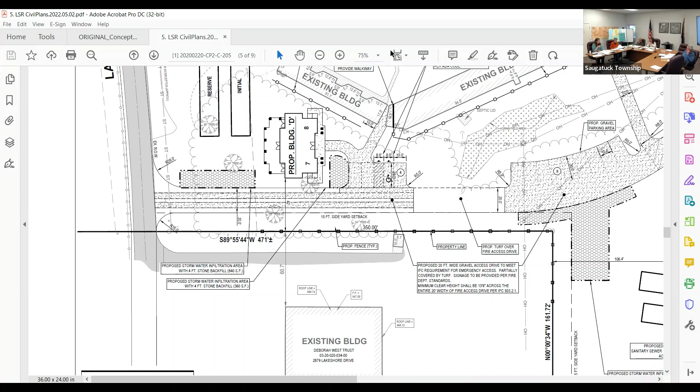I did speak with the fire district, and the applicant has an incomplete submittal to the planning department for a private road that connects from Blue Star Highway to this property. It includes part of what's labeled as the existing two-track at the north.

I asked the fire district, if that private road were to be developed, would that meet the fire district's request for the second point of egress and ingress? They suggested it would be uncommon for them to respond to a call on Lakeshore Drive and use a private road from Blue Star, that it wouldn't be the most intuitive, direct route. They said that if this driveway was not installed for this lakefront home, all of the drives within the current development would have to be widened to 20 feet. So it poses some site constraints for their existing development.

The proposed driveway is a 20-foot wide gravel access drive that meets the requirement for emergency access. It's partially covered by turf. Then there's a proposed gap between that 9-space parking and this two-track gravel drive, but that would be turf over fire access drive, so planted over it. So there wouldn't be a paved connection from the driveway for the lakefront unit and the 3 units at the rear. It would just hold the weight of the fire truck.

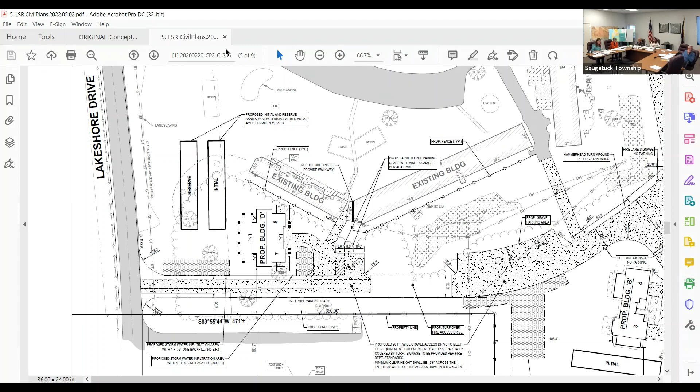I did note a few other things in my report, just about the wetland delineation. I know the engineer replied that there were no wetlands. We just put this caveat in there because the site is within 500 feet of Lake Michigan. There may or may not be a need for an EGLE permit, but we want to see verification one way or the other. The township engineer reviewed the site plan and provided some comments.

The buffering was something that I was concerned about between the 2 plans, so I think that's worth discussing. The lighting is downward facing, it's modest and pedestrian scale, it meets the requirements of our ordinance. There would be no outdoor storage. We didn't have many other issues, it was mostly that we wanted to see updated floor plans.

Some of them were mislabeled, and some we weren't provided renderings for each floor in the building, so it was very unclear, especially where that parking was integrated. We didn't have a floor plan for that. We don't see an elevation showing the height, so I just want to verify that the floors and the height meet our ordinance.

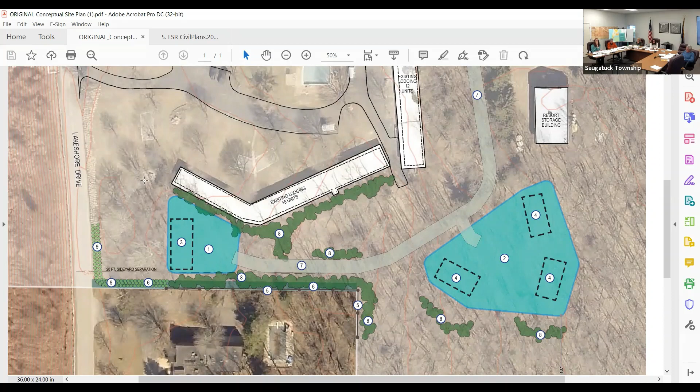After that, we got the approval and moved forward with the specific site plan design, working through with the fire district, the engineers on drainage, and the health department. There's a lot of different aspects. The plan has evolved to the point that it is now, but we still assert that it's very much the same.

Some of the things brought up by Lene I'd like to address. The first is floor areas, and I think the confusion comes from terminology. Floor area is an architectural term for the usable living space inside the structure. We as civil engineers use footprint to describe just the overall boundary. So the footprints here are very close to the footprints on the conceptual plan.

I created some confusion by putting floor area in the general notes, and I think that was in the application. But if you go with the footprints of the outer walls of the building, we're within about 20 square feet of what was proposed. The front building, the Lakeview building, actually has a slightly smaller footprint than what we showed with our conceptual rectangle, and the ones in the back are slightly bigger.

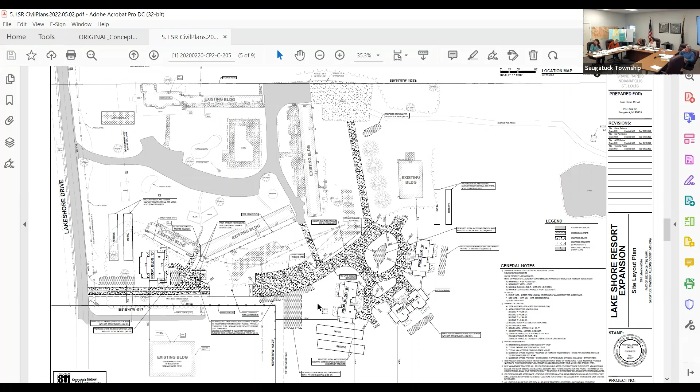Would you like your plans up on that board? I can put those up there. For the public too, at least, even though we have them. But I don't know if that would be helpful for people to see. Or us. Yeah, I think we want to see that too. Where's the best spot to go over here? I don't know, how do we get everybody to see... well, this makes the parking better.

We did this plan to show how little is really gravel here, once you bring the turf in to make it look narrower.

They do have a section of the fire lane here that is only for emergency access, so only cars staying in this front Lakeview building would be using this access, just these two units. Everybody else accesses through the existing resort to get to the back units.

Did you eliminate the hammerhead? No, the hammerhead is actually back here. So the emergency access, the fire truck would come in here, go across the turf, and then they would turn around and leave that way. That was actually a more direct route than having them come around through here and circle around to get back there, so that's why it was set up that way.

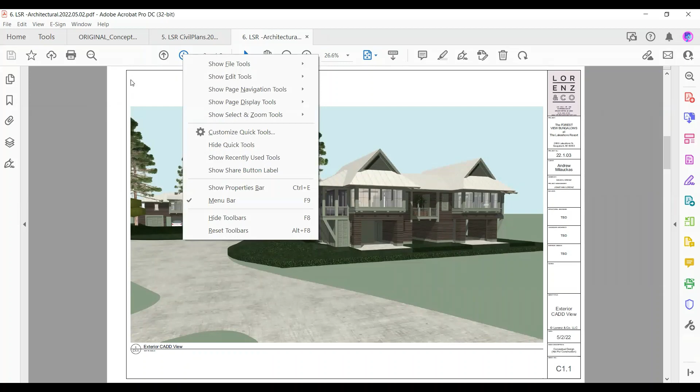But it's not gonna be right there. You'll notice it though when you go down there. I mean, well yeah, it'll be the new building. Yeah, because there's a lot of other new buildings on it too.

So what square footage of this building? No, well, the total - each unit square foot total. Oh, 26. Plus the deck, I don't know what that is. You know what this architectural square footage is of the Lakeview building? The Lakeview building is...

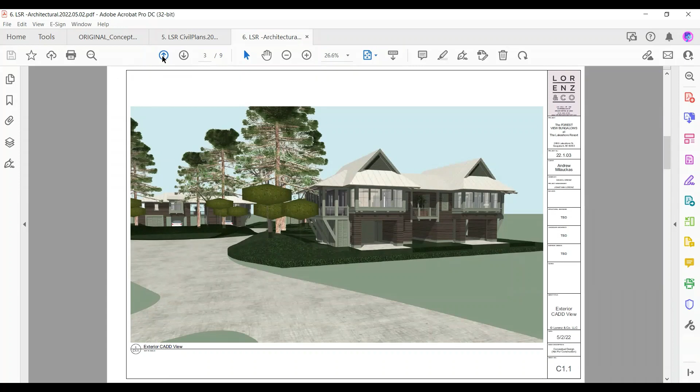Roughly 2,500 square feet. Yeah, that's right, we have 2,600 on the. And then the decks are another 500. Maybe you added it up. Well, the front deck was 528 on the one, let's see.

What's my total now? That's great, 600. There's some access ways and stuff that'll make it about 600 square foot a deck. That's per floor, so there's 600 above and 600 right below. But you're still even with that under the 7,000. We're at 65.

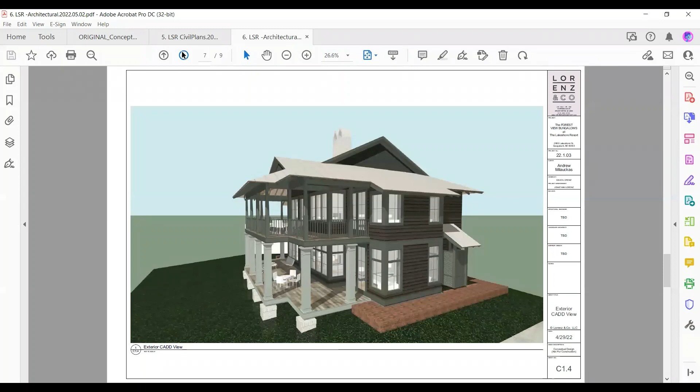I think the thought initially this evening was questioning whether this project needed to go back to the ZBA, just for clarity, but I think the overall concept is there. I'm not sure that I would agree it has to go back to ZBA. Initially we didn't have a lot of input on this project, and tonight we have the property owners here with us that would be most impacted, and to hear them say they're 100% for this makes me consider that we probably don't have to have a public hearing on this project, correct?

That's the feel. If we can come to agreement that you did go through all these things and say the fire district and the engineering report and all of those things were doable. You did not say that the report from Lene was doable. I guess just for clarity.

Andrew or Joe, what is the square footage of all of your current resort buildings that have the lodging in it? I don't know that I know just the lodging, but the footprint is, I believe, 20,000, including all structures on that parcel or all buildings on that parcel. That would include the maintenance barn.

When we established the 7,000 number in our ZBA application, we never intended that number to include porches. When we planned the project and prepared that application, although it doesn't say it in the application, we created those numbers saying that didn't have to include porches because we were talking about interior space and thinking about the walls, not porches. So when we created the inventory of the existing buildings, we didn't include our overhangs and porches in that number. From our planning side, we've been consistent in how we look at that 7,000 square foot number. It was never intended to include porches, and these buildings aren't bigger than we intended them to be.

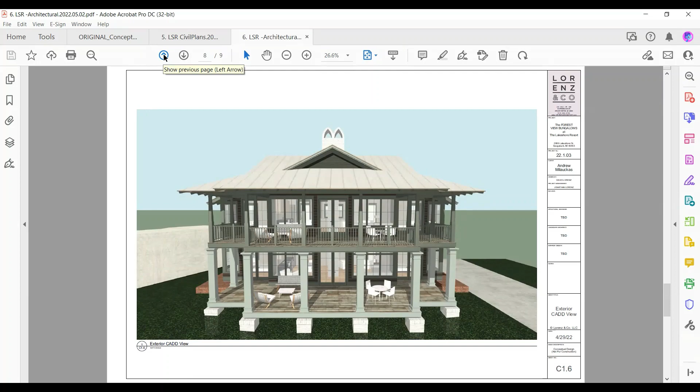I just have a question about the parking. If we went back to the parking conversation, would you be receptive to us relocating a few parking spots into this area if they weren't additional? To the front house, yeah, to here, to have more than the 2 spaces. Could we relocate 3 or 4 existing spaces back to this area?

I think we need to see a full current parking count with unit count and your whole development, to know where you're at with parking today and where you are compared to the ordinance requirements.

So you're really talking about visitor parking, because you have enough parking for just the units itself. So now you're just talking about additional parking for your visitors, which I would want to see. Because now you're incorporating more than just this area - you're trying to bring some parking and allow some parking for your other portions of your resort. So I would have to see that.

What do you do with the scenario you spoke about earlier, that the 2 sisters agree we're gonna spend 2 weeks there - it's not mine, I don't see that. What I'm saying is, if you have somebody coming from Chicago and one from Detroit, they're gonna have 2 spots.

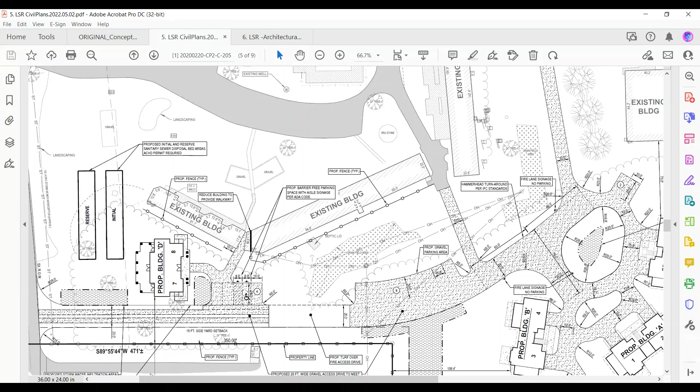So we're making this now consistent with the ZBA plan. Its purpose, especially now with limiting the parking here — I can imagine someone directed to pull in this way and maybe not find a place to park, come here and want to go back, rather than sending them back around in front of these units where guests are sitting at the pool. They're able to come back without pulling back into the front of the property. It's really just a completely internal thing that is consistent with the ZBA plan.

Anything else? I can make a motion. Okay. Move to support, approve the site plan for Lakeshore Resort at 2885 Lakeshore Drive.

Building renderings and floor plans with height dimensions shall be provided. Floor plans for all floors for each building shall be provided. Height and floor count shall meet the R3 district standards.

There shall be no outdoor storage. Parking is per ordinance section 46-47, H8, which is for a motel — one space per sleeping room, plus four additional guest parking spaces. Did I say that right? Yes, okay.

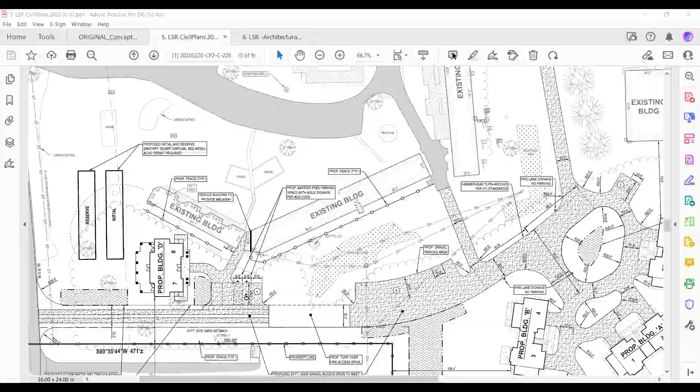Motion passed. Thank you so much, well done. Thank you for your investment in this project, and thank you for your patience. And thank you to your neighbors to the west for coming in and sitting through this. We really do appreciate it. It's been interesting, and it's a good combination. You guys are protecting us, although it's not needed in this case, but in some cases I'm sure it is. So it's a good system.

Welcome to stay, or you're welcome to leave. But we do really appreciate you being here and representing your project. I can't thank you enough for that. I look forward to seeing your project. Thank you.

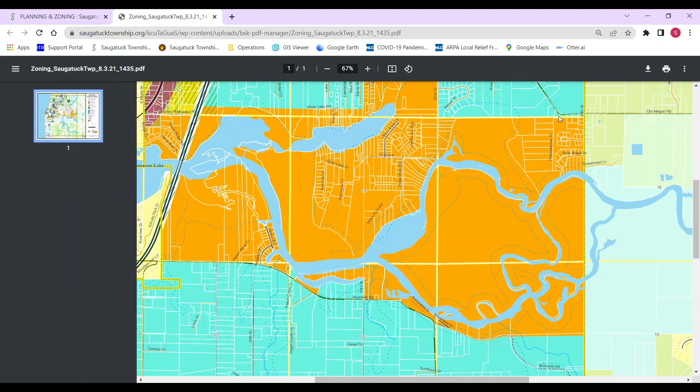So Becky, is this the dotted line you're talking about? I've got it on the screen now, see it's right here. It says natural river boundary, the tiny blue dots. It's on both sides, but there, just in this area. So that's where it is now, and we would pick up this area? No, no, it would not, we're not even asking to do that. It just goes right along, it's 50, however many feet the ordinance says, it goes like that. It's there, but this is way out there, that's the channel.

And that is already under litigation at this point, so I guess my thought is this is premature, actually. I certainly respect all this, but there's a lot of things I would want to consider.

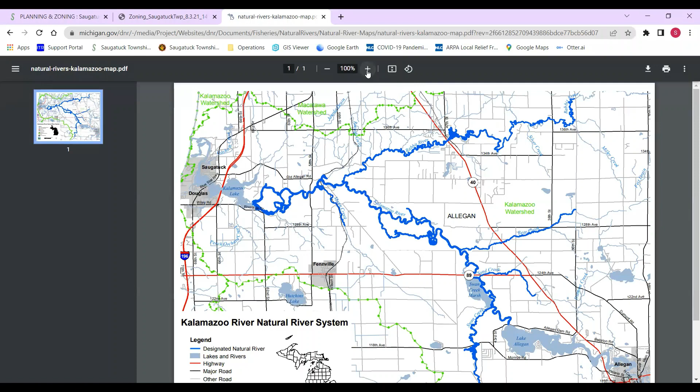I do too. Well, here's the thing, I would be tempted to approve this, but I take issue with the letter we got from North Shore's attorney. He believes that because we are including all that area of the river from where it ends up to the bridge... we're not including all that area.

So I guess my thought would be to refer this issue to the township attorney. Would this put us in violation of the consent order previously entered? I think it would, we need to bring a lawyer into this and look at the entire process. I'm a little leery about changing this, I'm assuming it's section 4591 they want to do, whether it's the entire ordinance. We're already in the process of updating our ordinance, so I would say we need to step back. Jane, is there a reason the extension is requested from where it ends now all the way up the river? So what you're asking is it would not be just isolating the area where it ends right there?

Oh, no, not at all. Not North Shore property. No, not at all. There's a lot. You're dragging me into this too, right? Oh, yes. Okay.

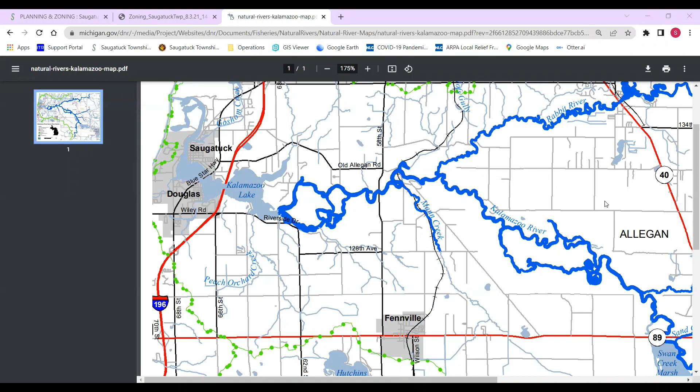And it was a mess, and it's still a mess 30 years later. So having the protection, along with the enforcement, I think is going to be key to doing this. But it's a lot of different properties, and it's not taking away property rights for development or anything like that. It's just saying, be back a ways, leave the natural area, that it looks the way it looks. There are other areas along here that potentially will be developed and might happen soon.

And if we could have the natural overlay, I think it would be very helpful. So that was the reasoning. The point of my question was, it's not just picking on North Shore, it's picking on all of the township property on this river throughout the course of it.

And that is the same boundary as our overlay. Everything west of that is not designated by the state as the wild and scenic natural river. So our overlay pairs with that state designation as it is today. I would just hesitate to go farther than that.

At this time, absolutely. And I do have a question, a couple questions though, Jane. If you could explain to me, what is the urgency of saying that we should be doing this and cover the channel area? I don't quite understand that. It doesn't feel right to me.